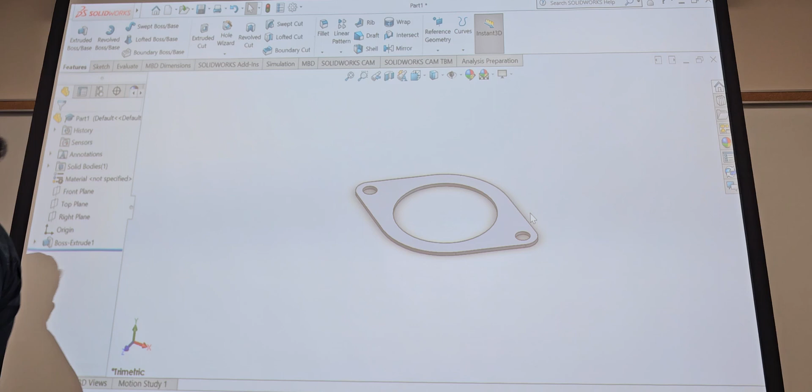You have to save the drawing. Whether you put it on a flash drive or a desktop, obviously that desktop has to have a screen too, but you have to save it somewhere. So go to File, Save As, and we're just gonna type right here, gasket.

So notice that right now, I'm gonna save it as a SLD PRT. So it's saving as a SolidWorks drawing, correct?

Now, like I said earlier, eSprit was smart enough to partner up with SolidWorks. Well, I don't think they're really partners, like they don't pay each other anything. But they agree with SolidWorks to let SolidWorks drawings be imported to eSprit. All the top major companies did that. So pretty much SolidWorks is accepted if you're using Mastercam, GibbsCam, eSprit.

There's another one called NX. NX I heard is really, really good, but the problem is it's so expensive, so not that many people use it. We gotta realize that if you buy SolidWorks straight up for your company, I don't even know how much it costs. One of those things where it says purchase this, call somebody so they can give you a quote. Maybe that's gonna be a lot of money, if they don't even put the price on there.

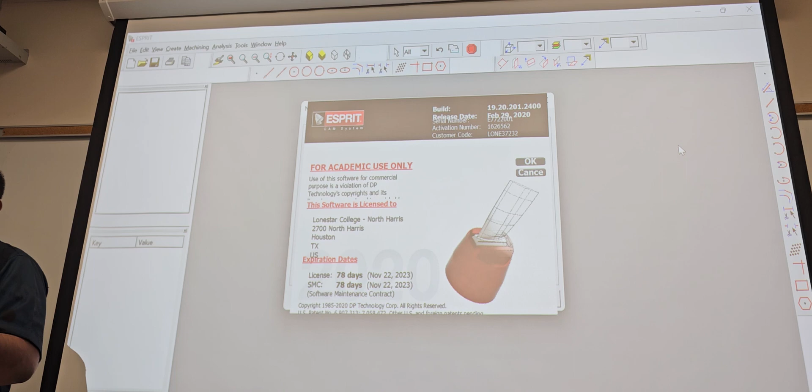Now from there, I come over and open up eSprit. Oh no, I've told these guys to update my eSprit. You guys see how this says release date 2020? The ones on your computers are 2022, updated, because this logo is blue, and your expiration expires sooner than ours. So let me see if it's gonna let me import it here, because last time it said it was just a blank document.

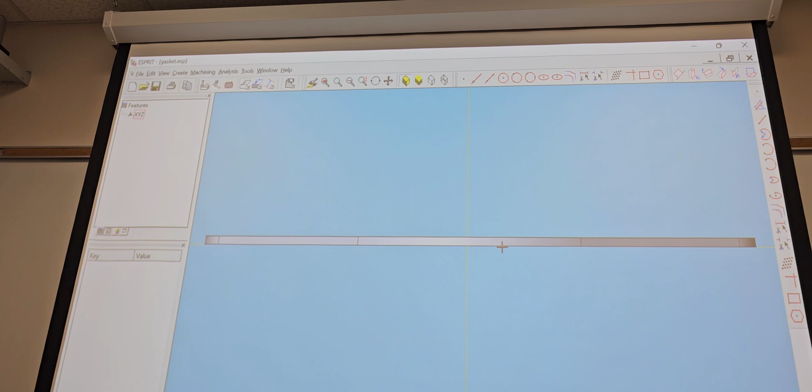So if I go to File and Open, it's showing all the eSprit files down here. I'm gonna click the SolidWorks file, SLD PRT. All right, let me... all right, cool. There's our part, right?

So like I said guys, typically every company has their drafters. The engineers are gonna get with the drafters, and the drafter is the one that's gonna draw this part on SolidWorks or any other CAD software. Then once that happens, you're also gonna make the blueprint. Then they give it to the machinist, the programmer, and the programmer can open up this file and import it into eSprit. So now we're gonna go to the programming side of the job. We were basically acting like the drafters when we drew it up. Now we're gonna put on another hat, of a programmer.

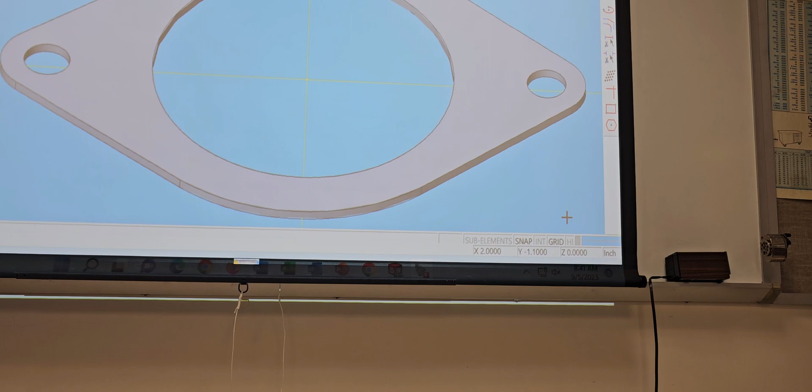Okay, so we gotta know how to use sub-elements and hide, and then snap and grid. With snap and grid, say I wanted to add a point down here, it will grab it, it will make that point - oh, it's not on a Z. If you hover around it, it's gonna find the center of that point on the snap and grid. But if I wanna click one surface, one face, I gotta change it to sub-elements and hide. I know some of you guys had that issue on Thursday, y'all weren't able to figure that one out. So make sure you go to sub-elements and hide.

So now if I click on the face, it's asking me, is this the face you really want, with a question mark? So you left click again and confirm, saying yes. Like I said guys, you want to go to tools first, go to options, change this group items to a different color, because when it's dark gray like that and the part's gray, sometimes you don't know what face you highlighted. So if I change this color for group items to, let's say, pink, I hit OK, then hit OK. Now if I highlight this face - there we go - I know that's the face I want it to be on.

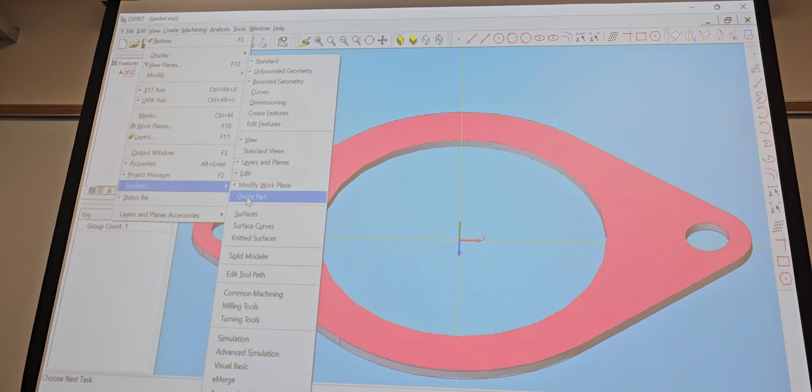So when you go to View, you want to turn on this UVW, because it's going to tell you where your axes are at. Then we're going to go to View, toolbars, and come down to orient part. This is gonna open up another little window on the right with three different options, X, Y, and Z, with an up arrow. So when I click this, boom, you see that came up?

Now, the problem whenever we import the drawing from SolidWorks is that if I did it on my top plane, it's basically gonna be on my front plane when I import it to eSprit. So that all has to do with how you drew it, whether on top plane, front plane, or whatever. But luckily we have the option to rotate the part. Because how much would it suck if we didn't have that option? From the get-go you'd have to do it strictly on front plane no matter what, and it has to stay like that for the whole drawing. That wouldn't be so great.

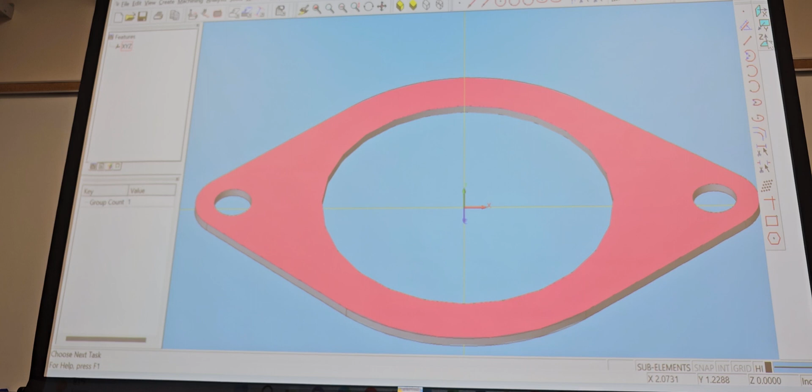So luckily somebody way smarter than me was able to make this software and give us that tool. So when I click the face, Z up, boom - you see how that part flipped? So now if I hit F7, that's my top plane. So here's my X, my Y, and my Z going down.

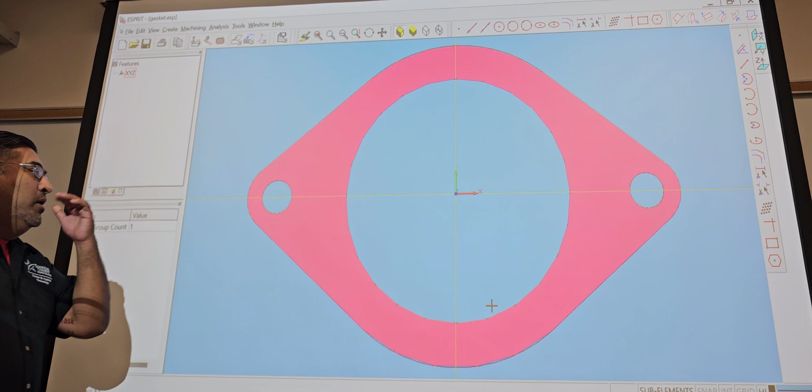The reason we're doing this is we gotta imagine doing the part as it will be on the mill. So this is the way we're gonna machine the part from our Z going down. That's why we have to know how to rotate the part, how to get it where we need to be. You remember that example I showed you with the Z plate, how you can move it on your X-axis and your Y-axis? The way the engineers or drafters draw the drawing, you don't have any control of that—they're gonna draw it any way they want. But once you import it, you gotta know how to manipulate it and move it around, and change the view so you're able to work on it.

So here's my part. Like I said, you want to have at least 3 or 4 of these features on so you have more control. If you don't remember how to do this, make sure you write down this for your notes. F2 opens up your features, and that's where you're gonna have your chains, your toolpath, and everything else.

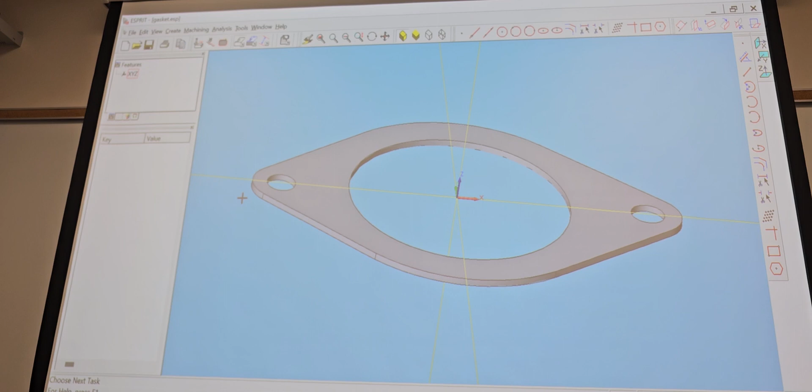F11 turns on your layers. Layers is similar to your mask, where you can activate or deactivate something just by checking the box. But I like putting it in layers because it gives me a lot more control.

Depending on where you work at, that programmer has their own style of doing things. For me, the way that's easier for me—right now everything's on default. So I hit new, I can make a new layer. On this one I'm gonna put 'geo' for my geometry. I'm gonna hit new and put 'part solid.' Then I'm gonna hit new and put 'chains.' Then I'm gonna hit new and put 'toolpath.'

Like I said guys, depending on where you work at, it's how they do this. I worked at a shop before where, because you got competition everywhere, people talk mess about somebody else. At this one company we had two different programmers who'd been working there a long time. One would be like, 'oh no man, you don't need to put all those layers, you only need like 1 or 2.' The other guy had like 10 of them on there, and he'd always talk mess about the other one, like 'that one doesn't have his stuff organized.' And the other guy would be like, 'oh, he does too much, you don't have to do all that to get the job done.' But whatever you feel comfortable, don't let nobody take that away. However you get the job done, that's the most important thing.

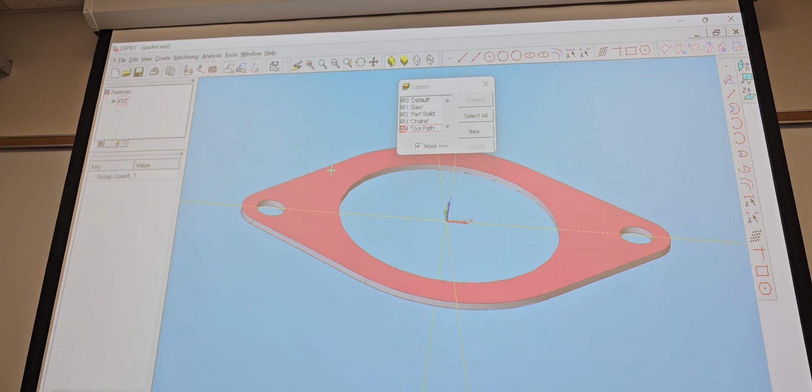So if I come back over here and click my part, notice that I just got my face. Why? Because I still have sub-elements and high on. If I take those off, now I'll push snap and grid. Now when I select the feature, it selects the whole solid, not just grabbing one face. So over here, under my key, if I open up general, down here is my layer—I could change which layer this part is on. I'm just gonna click part solid. Now if I uncheck it, the whole thing goes away. Does that make sense?

I don't have a key on mine. Is it the bottom tab? No, push Alt Enter. Alt Enter opens up this key. So F2, F11, Alt Enter.

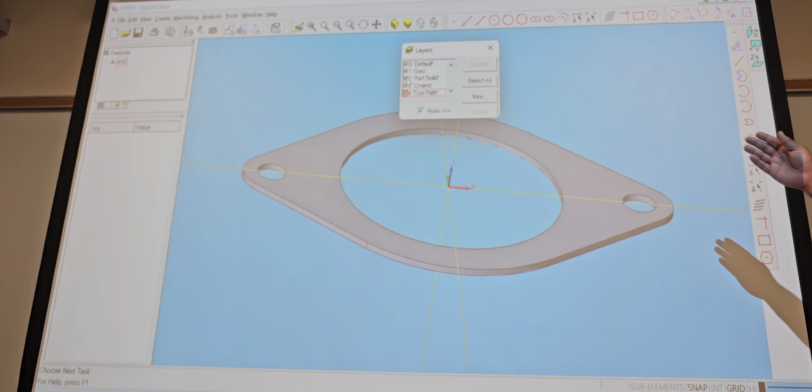If you push Control M, that opens up your mask, but your mask is pretty much like your layers, just a lot more. See, if I push Control M, that's my mask, but there's a lot more options here. You can take off the part, you can take off the toolpath, pretty much what this is, but we only need minimum these, so that's why I like putting the layers instead of messing with the mask, because there's so much on there.

So when you just did that, can you redo what you just did real quick? Cause I was trying to follow along but I just didn't catch it. On the key—yeah, like I said, your snap and grid have to be on.

You select the part, right? Now under here on the general, you open up the layer, and I could put this on any one that I made, right? So I'm gonna keep it on the part solid. So now if I check part solid, I'm in control of it now, right?

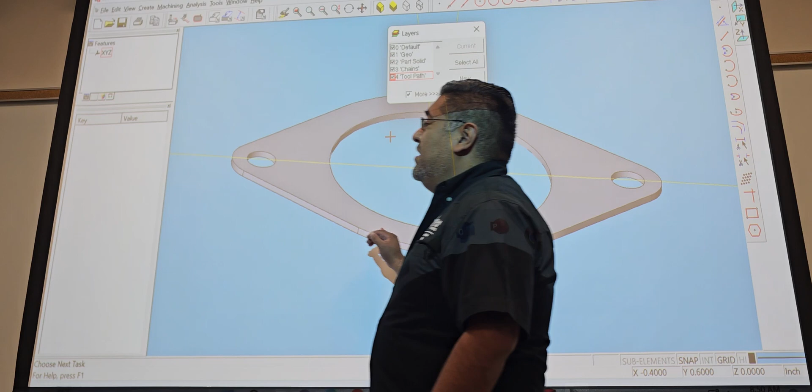When it comes out, it goes back in, correct? So now for me to do my chains, I need to be able to select my lines, right? So obviously right now I don't have any lines. Well, I have the solid, but I don't have any lines, wireframes in the background, right?

So what I'm gonna do is go to Geo, because I want it on the Geo, right? Click the part, right click it, hit copy, and go to Smash. With Smash, you gotta have wireframe on. So right here is checked, correct? Then we hit OK.

Now, if I turn off my part solid, there goes my wireframe.

I think I did part solid wrong. You did what? Did part solid wrong. Oh, does everybody have this so far?

All right, now that I have this, basically all I'm gonna do is what we did in intro, correct? So in intro, we learned how to make your lines, how to make your toolpath and everything, right? So it's basically what we're gonna do now, what we did in intro.

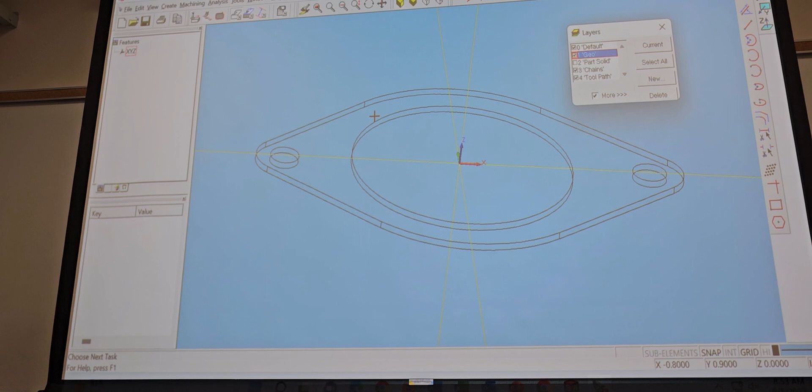So, a big thing guys, is once you start doing your chains and everything like that, a lot of people that learn just here in the classroom setting, they don't do it correctly like in the real world. Why? Because they don't put the tools organized and make them like it would be in the real world.

Does that make sense? So if I just get a tool, it's gonna randomly select a number for me, like 165. Well, if I take that program and put it in that Haas, how many tools does that Haas have code? 20. Where the heck did they get the other 165 from, right? So when it calls that tool out, it's not gonna know what to do.

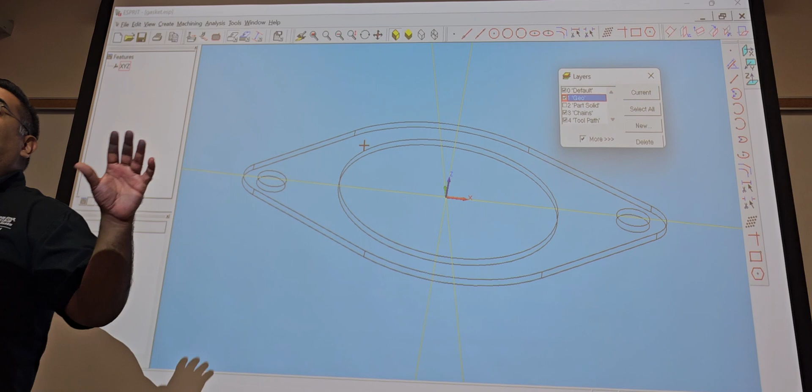The machine itself is gonna give you a code, right? So here it's gonna run the simulation, no problem, because it's in fairy tale land, right? But we need to start thinking as programmers, is this gonna actually work on my machine? Because this is like anything else in life, guys. If you do it good, if you do it perfect, it's gonna do what you want it to do, right? But there's so many ways of messing up, and not a lot of ways of doing it right.

Does that make sense? So, bottom line, what we do here, we have to be able to put it on the post processor, correct? Put that on the machine, and make sure it cuts out this gasket, or the part that we're making, right? So right off the bat, I gotta be thinking, okay, what operations am I gonna do? How am I gonna do it, right? In real life, what will we do first as an operation on this?

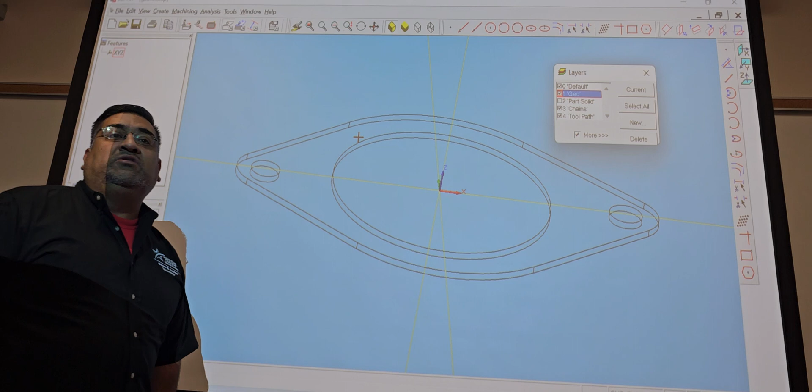Face. Facing, right? You always do facing first, pretty much, correct? So, if I just click on the outside lines and I put my face mill, depending on what size it is, it probably won't make the proper cut. Does that make sense? Or it's gonna face it and it's not gonna touch the whole solid. It's just gonna touch like on the side or something else, correct?

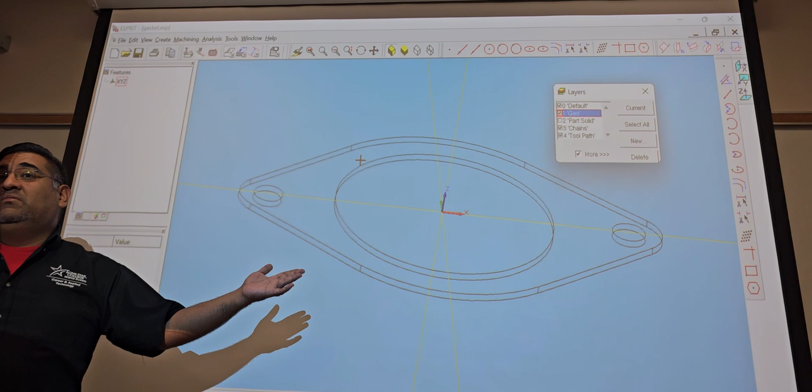So a way to get away from that is to make more lines, right? A lot of people think, nah man, you can't add more lines because that's not the part. I can tell it to do whatever I want it to do, as long as I know how to do it. Lie to it. Exactly, right? You can lie to it.

Does that make sense? So me, I like lying to it, because it feels like if I got away with something, and I didn't get in trouble, and I got away. You know, like it's all right. It happened, so it's cool. So I love lying to that machine, right? As long as it does what I need it to do, whatever you gotta do, you could do it, correct?

So, if this gasket, so the thickness is what? 2.5, 2.66, no, 2.88, right? So from this top to this bottom, it's 1.44 radius, correct? So it's 2.88 wide, big, correct?

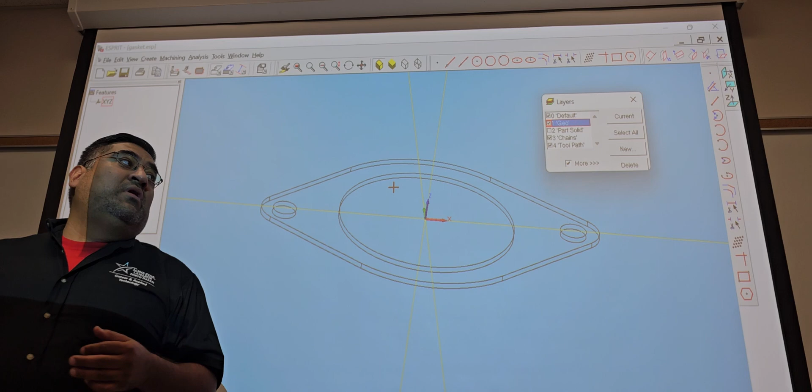So from the get-go, I gotta start thinking how my machine is, right? So what tools do I have? So for example, tool number one that we use on there is a 3-inch diameter face mill, correct? So I could actually just do one line going through the part, and it's gonna face off all that material in one shot. Does that make sense? So that's all I'm gonna do.

I'm gonna hit F7. I'm gonna grab a line, and I'm just gonna come from here.

Oh no, wait. Yeah, there it is. So now I'm gonna go to create, features, get a manual line, go from here to over here, and then stop it. Where's my stop at? Why does this look like this? Hold on guys, this always happens.

Bring that down, bring this over, bring this down. There you go, see, it was hiding. So now that I made that line, I'm gonna hit stop now. Where'd it go? Why isn't it making it?

Is it working for you guys? The manual or the auto change? The manual, can you click on that line? Yeah, is it making that line for you? It's on and off.

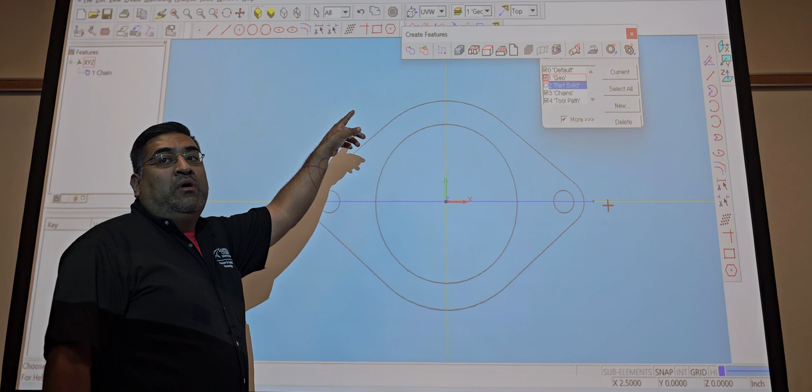That's it, right? So then you click the chain and then click on the, from one point to the other? Yeah, click on one point, click manual chain, the blue one, right? The red one's auto, the blue one is manual. So you click one end, you click the other end, and then you hit stop on the top. Okay, and if you don't hit stop, it's not gonna save that chain.

Yeah, you just leave it on. Like a car, automatic and manual. Huh? Auto and manual, yeah, like transmission.

Everybody there? Mine just never forms that chain. Did you do the points? Yeah, here.

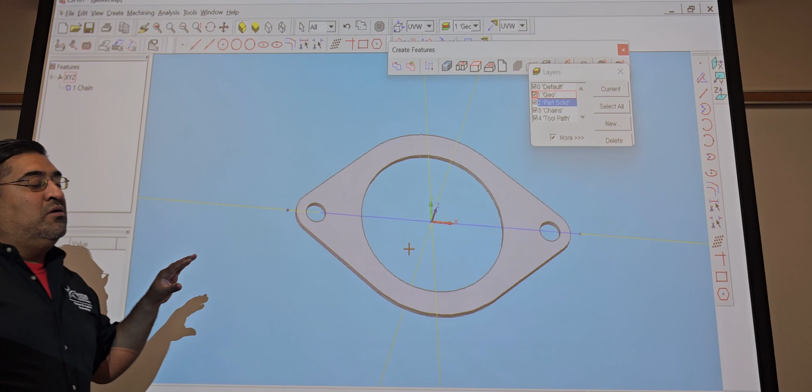Now we want to get our solid, we're going to put our solid in our simulator, right? So really guys, when I make a solid on the part, like the part stock, that's just in ESPRIT. It's not real life, right? But if you don't do it, you're not going to be able to see the cutting motion of it, right? But we know that out here in the real world, it's whatever you cut your stock material to be, correct?

So I'm gonna go ahead and we gotta go to mill first. So switch to solid mill. Then right here, the simulation comes out, right? And then over here goes simulation parameters. We go to our solid.

So just like Gabriel taught you guys, we can make this any way we want, right? So we could input the numbers in here, so we switch the numbers, or we could pick the arrow and then click on our part, and then it automatically generates the numbers for us, correct? Why are you laughing? He didn't show us that. That seems like it'd be a lot easier. Oh yeah, he showed us this last class. How did you do that, would be nice to know.

All right, look up here real quick. Once you go to the switch to solid mill, now you're able to click on this one, simulation, right? So hit simulation and then go to simulation parameters. So he made us really think about all the numbers we had to put in, and then on the start X, Y, and Z, we had to like put all these negative numbers in.

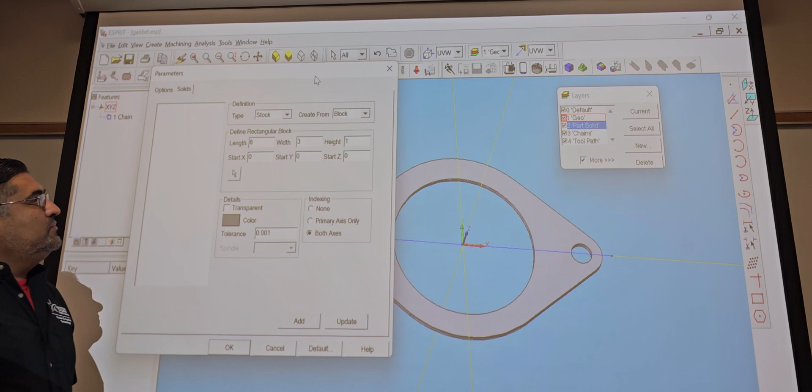So I mean, you can do it either way, guys, right? So let's say that in real life sometimes, what I do is obviously you gotta measure the stock material that you really have, correct? And then from there is when I input my numbers. So if I just click on this and click on the part, well, I'm not actually compensating for the actual stock material. Does that make sense?

But you can easily just change those numbers to compensate whatever you're missing from that stock material, right? So normally I just click this arrow, click the part, we see how it moved, right? So it set all my numbers for me. Go to add, there was a stock. Make sure you have to make sure you have the stock on there, right? And then hit OK. Now when I push the pause button, there's the material right there, right? And like I said guys, I could change these numbers to whatever I want.

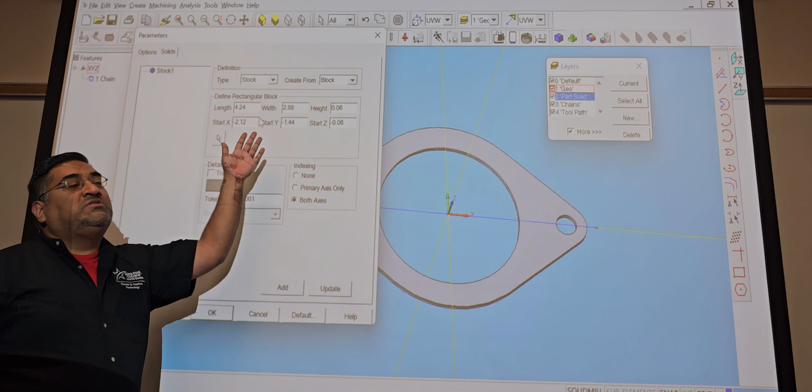So it is good that he taught you guys that way too, right? Because you could tell that, hey, my material is actually longer than this, or it's wider, or it's deeper than it, right? But just for our purposes, we're just gonna click it right now.

But if we were really making this part, we'd go out there and actually measure the material, and then we'd adjust these because your stock is gonna be different from the exact measurement. You're always gonna have more material in your stock, it's not gonna be exactly what this is. So if I hit OK, like I said, if I hit pause, there's the material, right?

So now if I go to chain, I come up here to solid mill traditional, I go to facing. You didn't select the chain first. It's not liking it, it's saying that it's not a closed feature. It didn't like just having that line on there, which I don't know if it's because of the software, but normally you could just make that and they'll make it for you.

Yours came out? Look at yours on the left though, it shows yellow then blue to the dot. I wonder if that's it. No, oh it's doing it. Okay, yeah, I think this is because it's the older model. Because mine is this 2000s version, your guys is newer.

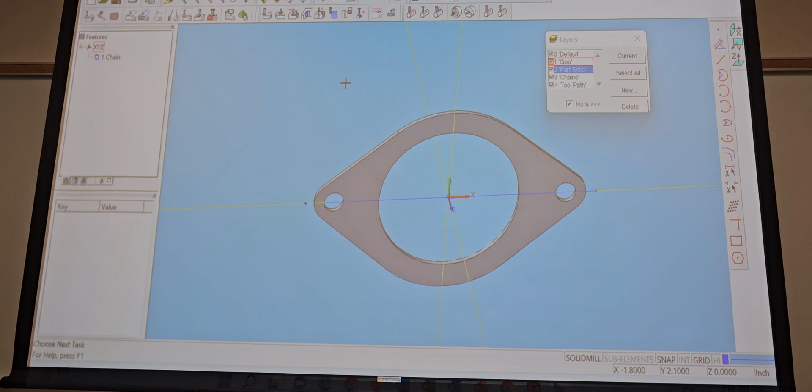I see why mine came up, so I went to milling tools. It's not even letting me do that. Yeah, I'm getting the same thing. Yeah, I clicked milling, switch to solid mill, and then it gives you this, right, and then it gave me a pick right there, milling tools, and then hit the face mill.

No, but that's just the tool ID and everything, it's not the actual facing.

Alright, so we're just gonna do this, we're gonna make some lines so then it could be enclosed, right? I think it's just because of the software. So if I go here, I bring it over, that is negative 2.2. Draw another one over here at 2.2. On this side, make one from here to here, so that's 1.5, take another one down 1.5.

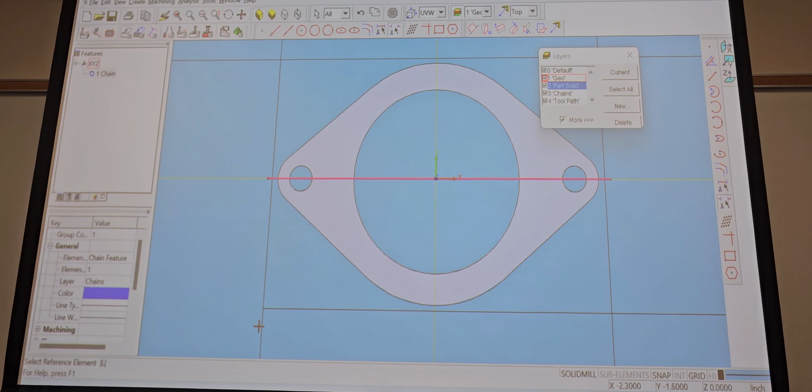Alright, so now I'm just gonna trim these outside ones. Now if I select this, I'm gonna go to create features, auto, right? Boom, it made that change now, right? So now from there, it should give me the facing now because it's enclosed. We got it?

That's weird, they didn't let me do it because I've done that when I worked at that shop and there was no problem. Older version. And you hit manual chain, right, and the box is auto chain. When you select the box, you just hit auto chain and it automatically does it for you.

Now we see how this arrow is down here and it's facing that direction, right? So if I wanted to change the direction, I could highlight the chain, right click, go to create, edit features, and here I could reverse the chain. Or here I could also change the start point, new start, and let's say I want to pick it up here. So you guys see how now it's up here, right? And then I'm going to reverse it there. So you could change it to any way you want, right?

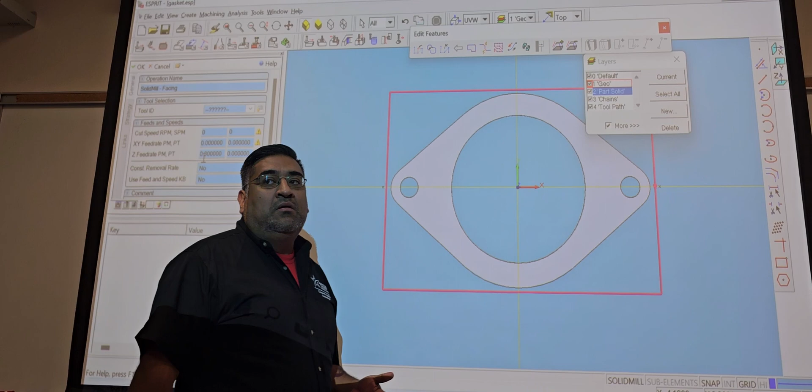Guys, now we're gonna highlight that chain, come to facing, right? So if we go here, if we click down, we could go to system default all. Now some people teach you to do that every time, right? When you do system default all, it erases everything and you start brand new. I don't like doing that because then you gotta check every little box again, correct?

Normally, let's say I would face this, the screen's gonna remember it. So next part I make of facing, it's gonna be like, oh this is what you had last time, do you wanna use that again, right? So when you're facing, it's normally the same thing, correct? So I don't like hitting system default all. Some people teach you to do it every single time, not me, I like whatever's faster, whatever's gonna get done.

So, solid mill facing, right? I come over here, I'm gonna click metric, go to inches. This little filter right here will tell me what tools I have. So I'm gonna use face mill, 3 inch. Hit OK.

Now, if I look up here, if I click on my tools, look what number that gave. 165, right? Now, I can't fix that until I get out of the operation.

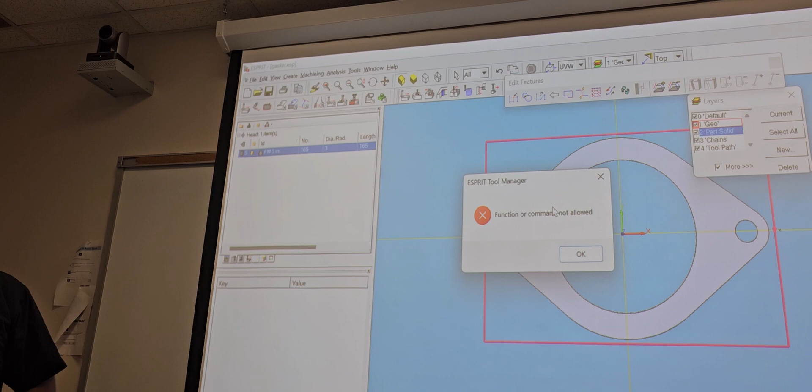So now that I'm out, you see how it's saying function not allowed? Because I have that facing operation open. I need to come out of it, so I hit escape and just come out of it. Now if I go to my tools, I'm able to click in it now, right?

So on this one, it's gonna be tool number 1, correct? And it's gonna change that automatically to a 1 also. So now I'm gonna hit OK.

So in our case though, we're gonna leave it as 1, because as a programmer, that's one of the things you have to do. A lot of times, if you're working on a program and it's not finished yet, the guy that's gonna run the part on the machine, they want a tool list, right? Which tools am I gonna use? So the quicker you can get them the tool list, the better and the faster it's gonna be for them.

Instead of just sitting there waiting for you, they can already start getting the tools together, right? Because obviously you need to put the tools together to run the job, correct?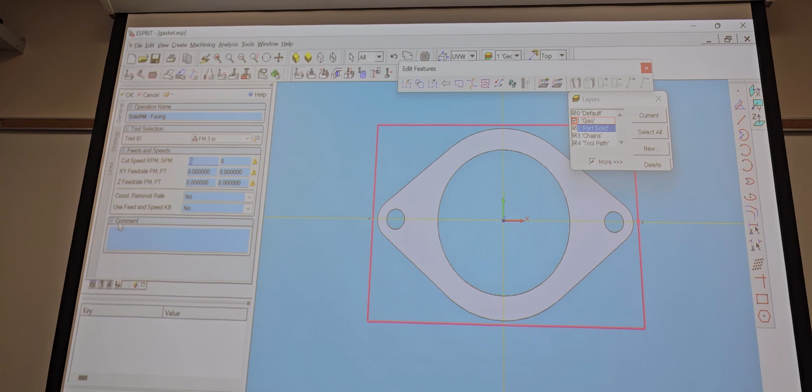So down here, it says RPMs, right? So obviously you're gonna change those RPMs to whatever your machine is capable of. If we're just running the simulation, you can leave them blank and it'll still run the simulator. But if I don't give it any numbers, once I run the post processor, it's not gonna have any numbers there. So what's gonna happen with that code, when you put it on the machine, you're gonna get an alarm, because you're not giving it a spindle speed or a feed rate.

Does that make sense? So, I'm gonna set the RPMs to 3,000. Feed rate on X and Y, I'm just gonna hit 20 point. And then my Z's coming down, so I'm just gonna hit 40. 100%.

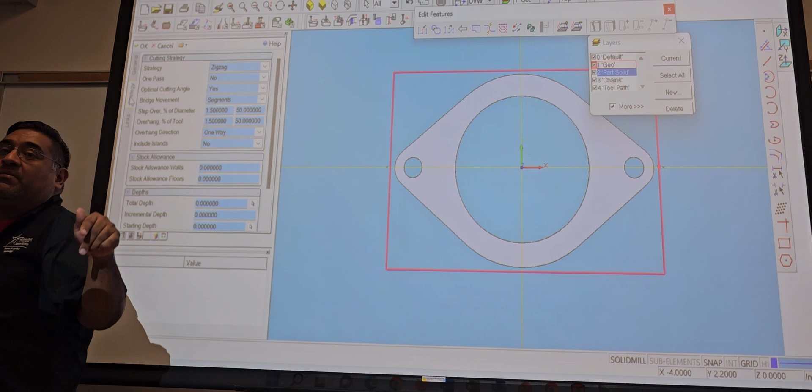Alright, so here, strategy, the cutting strategy, I could go zigzag, I could go parallel, I could go straight, whatever I want to do. So if I move this, it's going to change the way it generates the code, the way the cutting path is. Does that make sense? So that's what the strategy is. See how it's zigzag, conventional, or climbing, right?

One pass, yes, no, or adaptive. Optimal cutting angle, yes. Bridge segments, all this is fine. Your step over is at 50%. So this is how you control whether you're going to take 1 pass or 2 passes on there.

Stock allowance for the walls. Obviously, we're facing, so we don't need to worry about the walls, because we're just facing it.

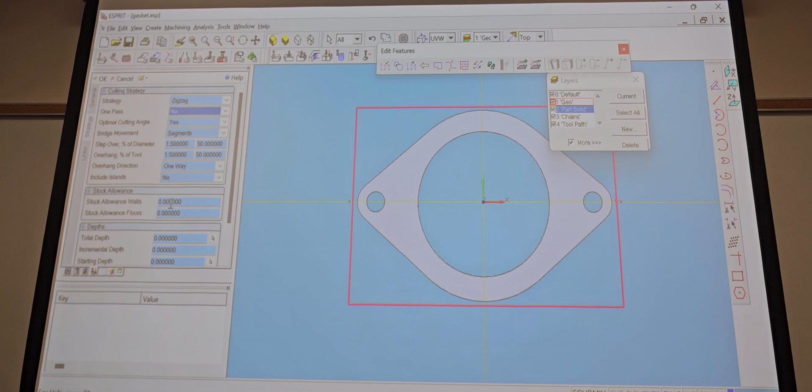So let's say that in real life, we're making a part. One company that I worked for, we would make molds. So we would machine this aluminum out for the creation of a mold, because they had molding machines. That molding machine would inject the plastic to the shape that we cut it. That job was kind of hard because they had a lot of tolerances of plus like 5/10 of a thousandths minus 0. So what we would do is we would leave stock allowance on the walls, at least 5 thousandths, so we could baby the tool in there.

But that's how you control that in real life, when you put your stock walls. So you got finished passes and everything else. Does that make sense?

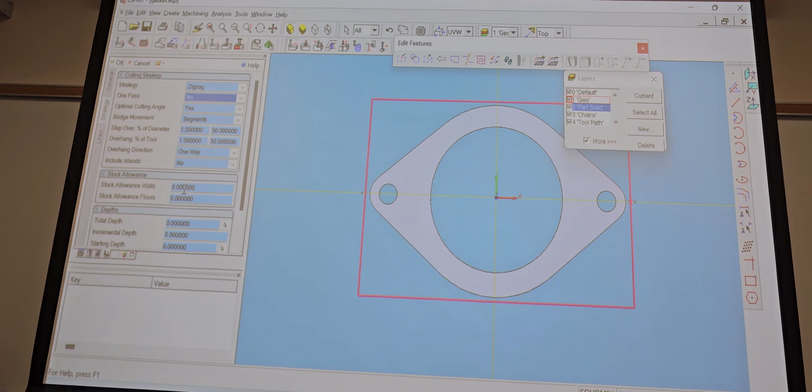So, total depth, we're just gonna put 5 thousandths, because if not, we're not gonna see a cut or anything like that.

Stock automation, we're just gonna leave it as no, because it's just gonna be the stock. Links, so this is the entry mode, this is how it's gonna enter. It's gonna go down, then over. Obviously, we can change this to whatever we want. Rapid down, and then feed over.

And exiting mode, that's how it's gonna exit. It's gonna go over, then to the top. So depending on what operation you're doing, these will sometimes change. So, for example, if I'm doing the circular interpolation, it's gonna give me more options.

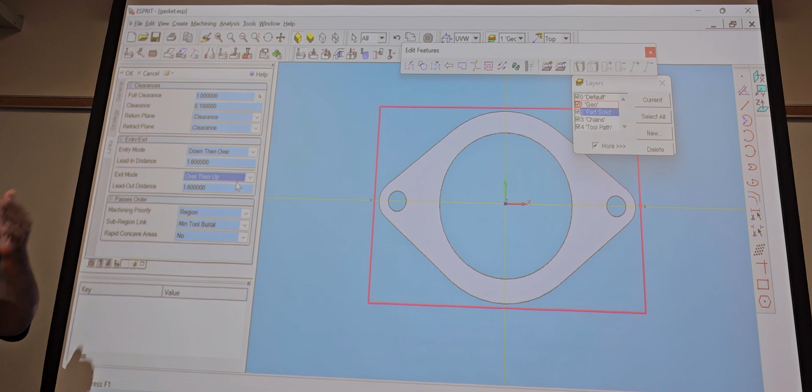But since it knows that I'm facing, all you gotta do is approach it this way and exit it that way. There's not really much to it. Does that make sense? So we hit OK. So now we see this line right here, right?

So that is gonna be my toolpath, correct? If it's not on the toolpath, like right now it's on the geo, right? I can just change this to toolpath, correct? Now if I hit play, boom, it faced the part, right? So we see here, it faced one side, then it faced the other side, right?

But like I said, it did it like that because we left zigzag on and we told it to go 50%, right? Let's see what happens if we tell it to go 100.

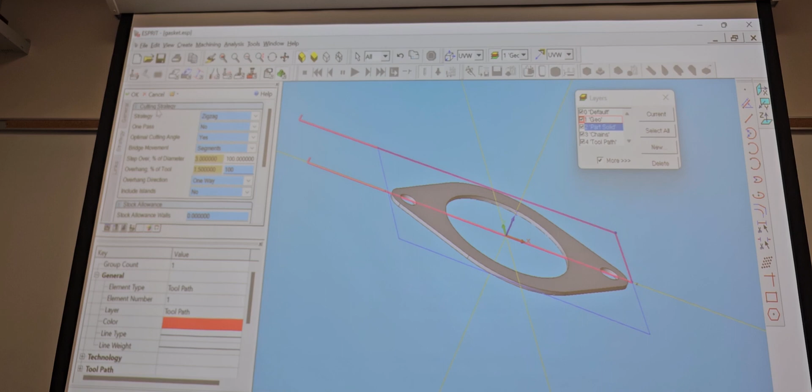Y'all see how I changed the toolpath now? Now it only does one shot. Does that make sense? And you just changed the step over there? Yeah.

How'd you get that window? The toolpath screen? Down here? Yeah. What is it, guys? F2, or F11? No, F11 is the letters. Push Alt Enter. Yeah, get it?

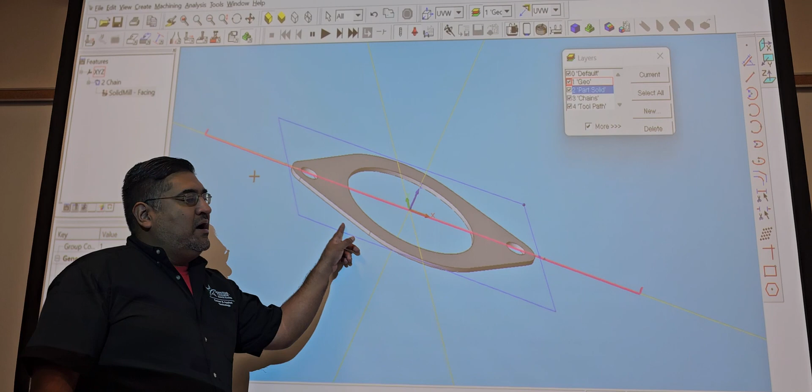We got our facing done, correct? So now we have to make the cuts on the outside, then the cuts on the inside, and then drilling the holes.

Normally you would think, is one operation gonna affect another operation? Does that make sense? So the order that you do it in, does it matter? Or can you do anything you want and it's not gonna be a big deal, right?

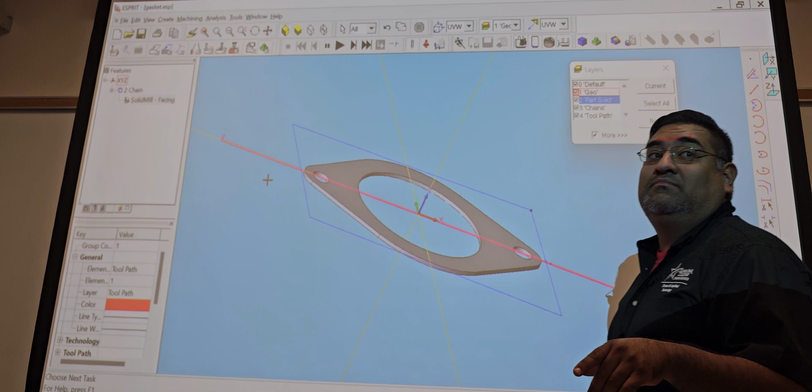For example, if I was doing a part on the lathe, and I had threads, but I still had to do the ID too, it had ID work that goes through it, right? What would you wanna do first, the threads, or would you wanna bore the ID? We want to do threads first.

Why? Because once you bore that ID, you got less material now. So whenever you do your threads, there's more of a risk of chatter. Does that make sense? So when you have the solid stock, the solid material inside of the part, there's less of a chance that you're going to get chatter on them because it's going to be more solid.

So you would want to do the threads first before you do the ID. That's what I mean by less wobble. So, is one operation going to affect another one? No, not really, right? I could drill the holes first. After I face it, I could drill the holes if I want, or I could do that part or this part, correct? Now, we're taking into mind that after we're done cutting that part, we're going to bore some jaws, put it upside down, and then, hold on.

So we're taking it into mind that we're gonna cut the part, put it upside down, and then face off the rest of the material, right?

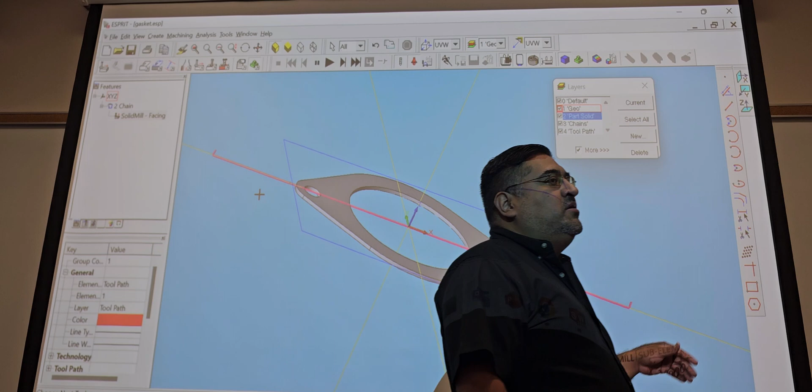Think about it, guys. If we were trying to do it in one shot, how hard would that be? Because think about it, you got the material there. Obviously, you would actually try to do the circle to begin with, because if I do the outside first, what's gonna happen to the part? It's gonna fly off, right?

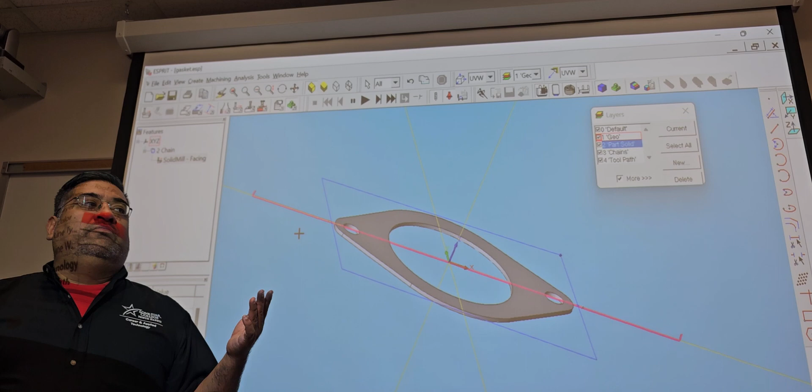Whatever I'm holding it with, the vice or anything else, correct? Correct. But since we said that we're gonna machine it first, then flip it upside down, and put it on soft jaws, it doesn't make a difference then, because the material's gonna stay intact. Does that make sense? Because that's the only real way you could do this. Yes, in the simulation, I could machine this and then machine that, and it doesn't matter because it's not real life, real life physics aren't involved in that.

Does that make sense? Everything is over here like in fairy tale land, right? So different things like that, we gotta make sure that we're covering as we're doing the part. Does that make sense? So now I'm just gonna take off my solid, come up here, and let's say, it doesn't matter guys, we could do the inside first, or we could do the outside first, it doesn't matter.

Before, you had us deleting those vertical lines. Yeah, so if I click on this line, if I have snap and grid on, right, I could click on that line, hold down shift, and then if I click on that line, look how everything gets highlighted, right? So if I hit control though, then I could just click these on the outsides. Does that make sense? So we can leave them vertically.

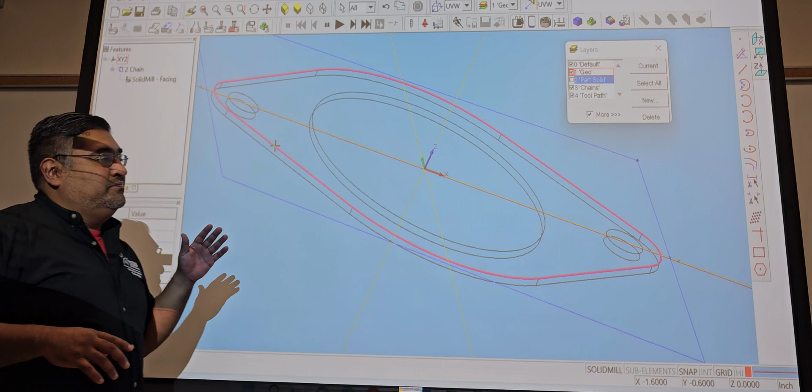So the reason why I had you guys delete it is so if you put shift and click on that line, it'll just get that top line, and that's it, right? Like I said, a lot of times there's multiple ways to do it. So just hitting control, holding it down, and clicking them individually would work also. Does that make sense? But yeah, normally, if you take off those lines, I just made it easier for myself, and I just gotta click shift and hit one line, and that's it, right?

So now we could either make a contour, most likely we have to make a contour for it. So we highlighted that, we go to create, features, auto chain, right? So now if I click it, that's the chain that it made, correct?

Now, depending on where the arrow is, so the arrow is right here, right? It's going up to the left, correct?

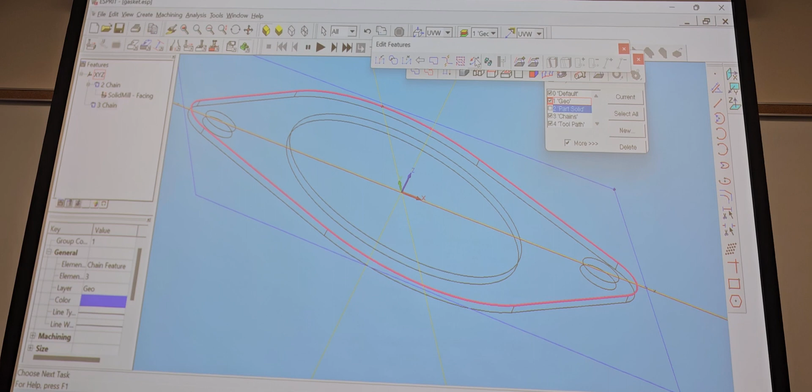So if I don't like it, like I said, I could go to create, edit features, and I could change it, right? So now it's going that way. That's the way I want it because I want the cutter comp to be to the left. Does that make sense?

But that's how you would change it. And that has a lot of play with your tool and what direction it's going in, right?

So if I start making my actual tool path and my tool is actually coming in here, instead of it being on the outside, that's gonna be because either your arrow is facing the wrong way or you put the wrong cutter comp direction. Does that make sense?

So now that I got that chain, I'm gonna click it, come over here to contouring. Now the same thing is gonna happen because I don't have that tool yet, right? So I'm gonna grab my end mill, I'm just gonna use a 1/2 inch end mill.

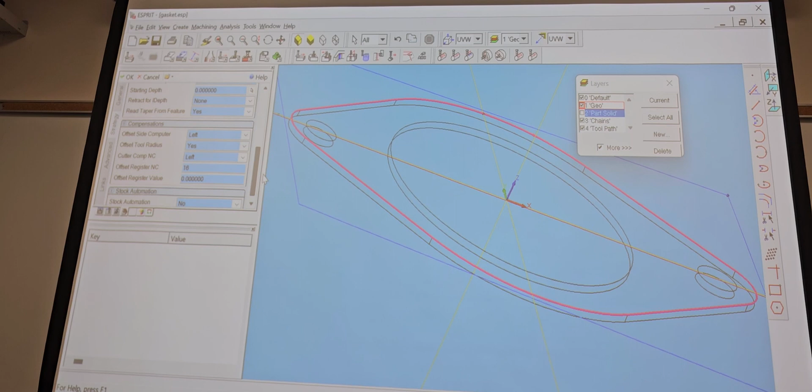Hit okay, right? Now it automatically gave it a number. But we see how right here it says offset register NC 16, right?

So that's telling it, can y'all see better with this light off? Because I know some of you guys are struggling to see. Is that better? Yeah, oh yeah. How is it for the video? Is it way affecting it? Better? No, it's way better. Okay, so...

So obviously guys, I'm gonna take the short route and just go to cancel because I can't adjust the tool while I still have that operation open, right?

So I'm gonna come over here now and that's gonna be my tool number 2, right? So tool number 1 is my facing, tool number 2 is gonna be that 1/2 inch end mill. Now, when you give the operator the tool list, now he knows where to load these in.

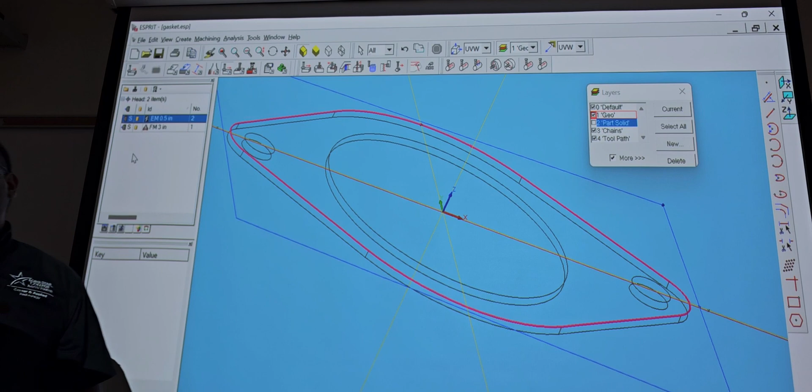Exactly. Now, on the lathe, that's why you still need to go through the program, right? Because a lot of times on the lathe, well 9 times out of 10, your tool number 1 is gonna be a rougher, tool number 2 is gonna be your finisher. When we start running into problems, it's tool number 3, 4, and 5, right? Because we don't know if it's a part off, we don't know if it's a threading tool, we don't know if it's a grooving tool. It could be any one of those.

So a lot of times the programmer, he knows tool number 1 is your rougher, tool number 2 is your finisher. But we gotta make sure that the other tools match the program. And you go down and look and see.

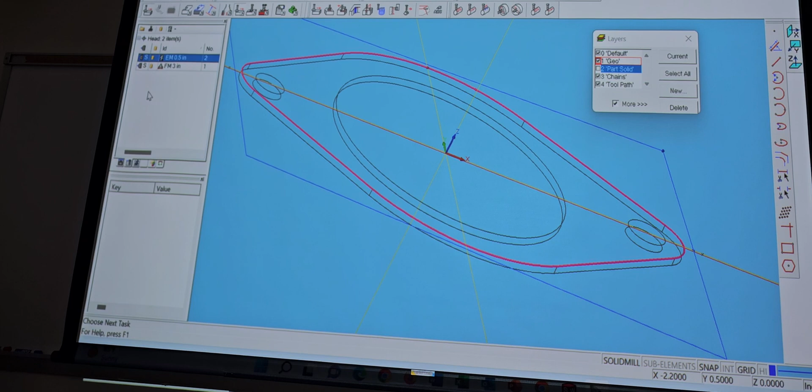You have to. And then the direction that it's spinning also, right? Is my insert facing up or is it facing down? Because if it's facing the wrong way, what's gonna happen? You're gonna kill that insert, right? Crash. Hopefully you just break that insert and then you stop it after that. But if it breaks and it keeps on going, bad day, right? Bad juju.

So now I'm gonna come back. I'm gonna go back to my chain. Now, guys, you can rename your chains to whatever you want. The rule is, though, if I start naming it like facing, turning OD, this, that, or whatever, it's gonna relocate itself alphabetically. Does that make sense?

So what I usually like doing is I'll click that chain, right click, hit rename, and then I'll put 1 dash facing.

Where's these? I'll rename it and put 2 dash, cutting contour OD profile. Or profile, whatever makes sense to you, right? That keeps it in order with the number.

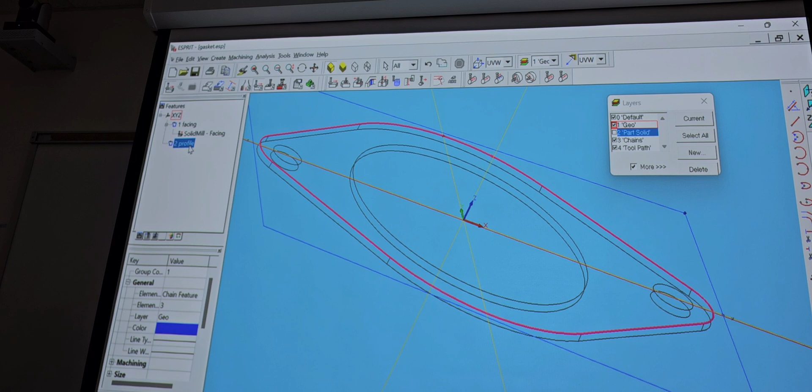By putting those numbers on there, it's gonna keep it in order, right? Like I tell everybody, make sure you take the extra time of doing that because you just have more control. Because this is a very simple part, correct? It's easy, but wait until you get to more difficult parts with 100 operations. If you find something that's wrong and you gotta narrow it down, this way you have more control of it. Does that make sense?

All right, so we have the profile. Did we check to make sure that it's good? No. Oh, we didn't actually do it. You gotta tie a tool to it.

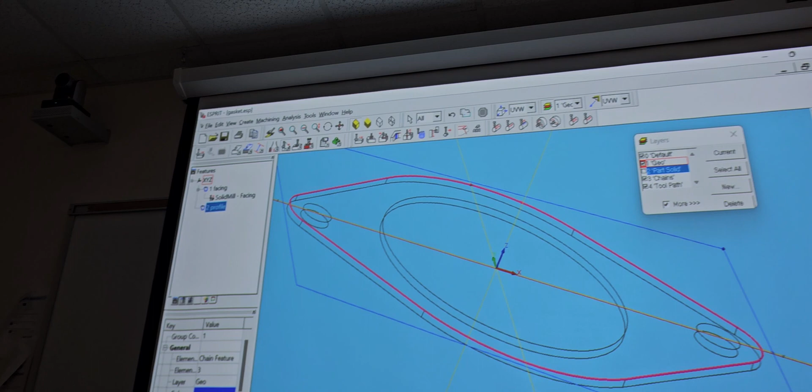All right, so started more traditional. We're gonna go to contouring now, right? So which tool? The half inch end mill, correct?

RPM, we're just gonna put 1500. 15,000. Whoops, that's gonna be fast.

Sounds like a dental drill. Put some oil on it. Grease it up. I think that would alarm out because I don't think it could go 15,000.

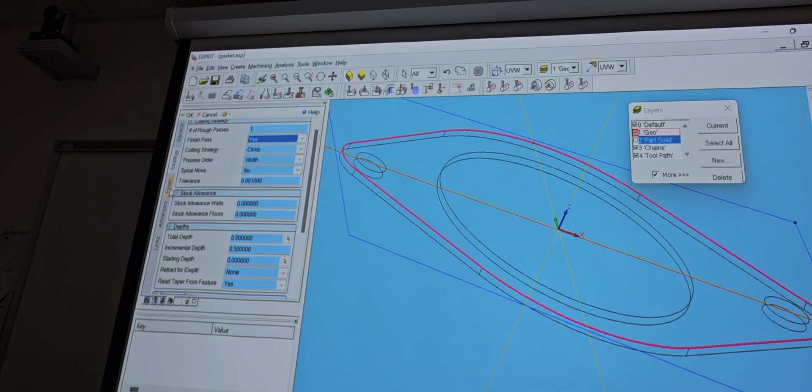All right, so over here on strategy, this number of roughing passes, we're just gonna go 1. Finish pass, no — if I put yes here, look what happened, another option came down, right? For finish, you guys see that? But we don't need it because we're just gonna pretty much cut it, right?

And if this is a gasket, it shouldn't really need tight tolerances, especially if we're talking automotive or some type of pipe. But if this was a part for NASA, then we'd need to get it down to the nitty gritty, not a Home Depot gasket. That internet thing, huh — hey, the ship's gonna launch, hey we need a gasket, go stop at Home Depot before we go, get some O-rings. All right, so that's what that's for.

Cutting strategy, climb. So obviously we can pick conventional or climb, right?

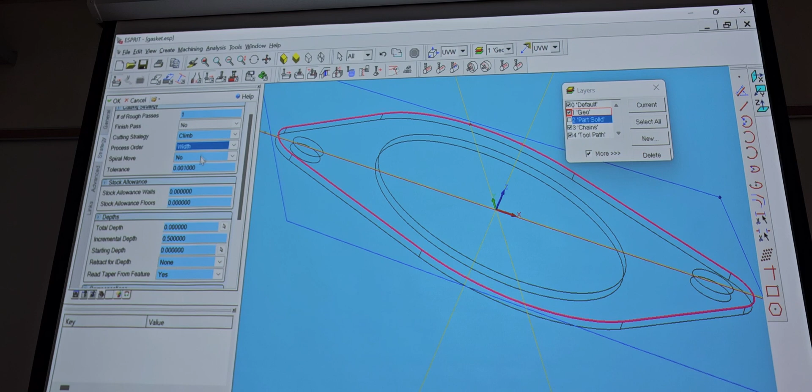Process order — so we're gonna be cutting it by the width, not the depth of it, right? Spiral move, yes or no? I sometimes put yes when I'm bored and want to see it do cool things because it spirals down — it's exciting for me. I don't know, all right.

Stock allowance, like we said earlier, for the walls or for the floor, right? If this was a counterbore and the depth from here to here was very important, then that's when you would leave it for the floors. Does that make sense? You leave like 5 thousandths on there, right?

Total depth, we're gonna call it 100 thousandths, right? So right here, incremental depth — if I leave it at 0.5, this is gonna do it in one shot, correct? Because it's only going down 100 thousandths. So if I change that to 25 thousandths, when it dishes out the code, it would take 4 or 5 different steps. Does that make sense?

Did he go over all this and everything in depth? Yeah, so you guys know all this already? We touched on the depth. But the depth on this, isn't it 60 thousandths? 60 thousandths? Yeah, okay, we're just going a little bit more to 100 thousandths, right?

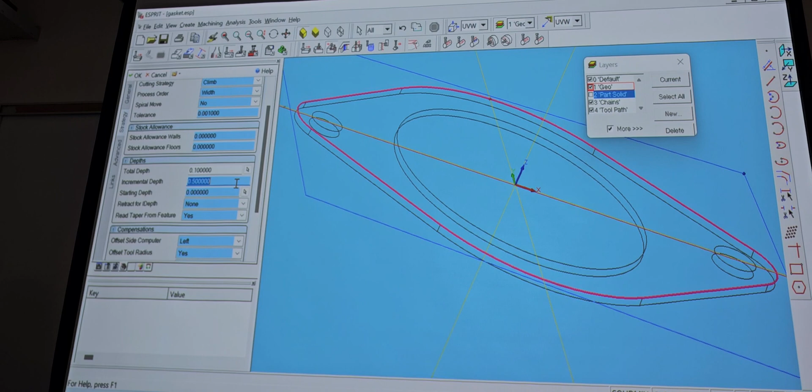Because obviously if you make one side, you'd have to go deeper because when you flip it over, you want it to be a clean surface on the other end, correct?

So offset side, computer to the left, right? That's our cutter comp, correct? Tool radius left, yes. Cutter comp NC to the left, right? So this arrow is facing this way, correct? If you have it on the left, that's why it's gonna cut on the outside of it. If I accidentally push right, it's gonna cut into the part the width of the tool. Does that make sense? So if you have that issue, that's why.

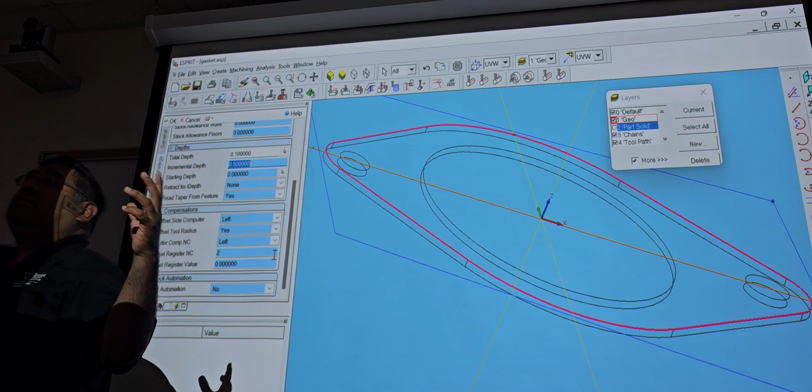Stock automation — like we did in the last class and I showed you guys, if I keep it at no, it's just gonna come over here and cut once, that's it. If I put yes, it's gonna take the stock material into play and cut all that, right? You guys remember that on Thursday? Yes, no, maybe — all right, we'll leave it as no for right now so I can show you both ways, all right?

Advanced — all of this is fine the way that it is. Links, all that. He wasn't even gonna try to pronounce that word. I said you said all this — you didn't even want to try to pronounce that word. I would say trochoidal. How would y'all say that word? Trochoidal — so that's just a strategy, that's how it's going in, and that type of stuff. But like I said, you don't need to change nothing on it, right? It could stay the same as it is.

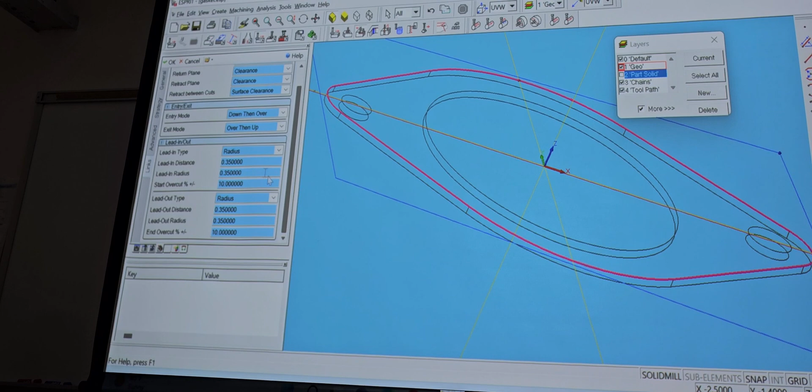Links, this is just your entry mode and your lead out mode, and that's it. So for right now, what we're doing, this isn't that important because it could approach and come out of it any way it wants, right?

Now when it comes into play, let's say we were doing a groove through the middle of it, right? So now I would probably have to change those values to make it come in from here, go up, and then leave, right? Because if you're asking it to radius in, but it goes in from the side, it's going to cut more or less material, and then that's when you'd have issues. Does that make sense? But what we're doing right now, it's not a big deal.

So when I hit OK, we see how the tool comes in here, and it cuts, and then it goes back there, right? Like I said earlier, we put no for the stock material, right? That's why it's leaving this extra material over here, correct?

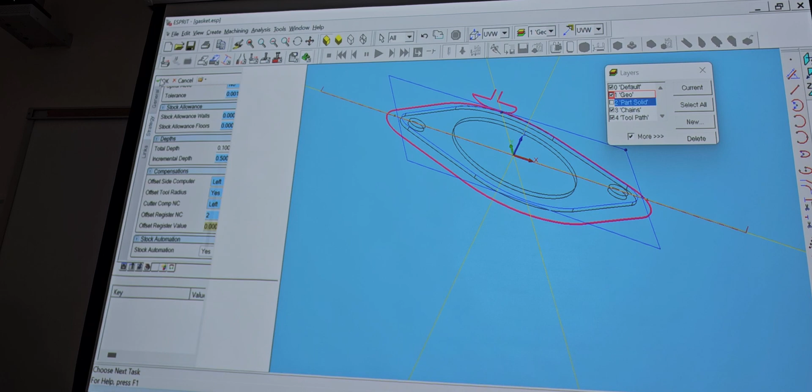If I wanted to change that, I would just go back to contouring, go to strategy, come down, and hit yes. So now when I hit OK, watch what happens to the tool path. That was something we could have learned last time. Right, so now if I hit play, we can see it come from the outside in, right?

That was on the, what's the, stock automation, strategy. Strategy tab under stock automation.

But if you're just cutting that part out, you wouldn't need that. You wouldn't care about the extra material, it would just fall off. It all depends on the situation, how you're holding it, and everything like that.

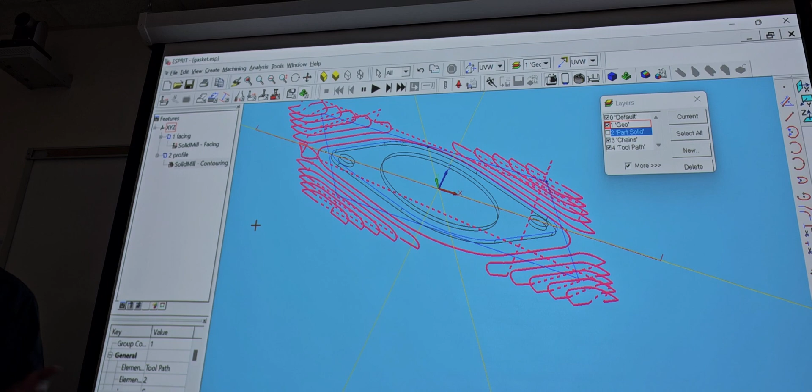If for some reason you're advanced enough that you're holding it down with a magnet, and it's magnetizable, then yes, you could just cut that and then unmagnetize it and take the part out. No big deal. But nine times out of ten, you're holding it with a vise or something else, right? So it needs to be holding it with something.

All right, so that's that one. Now if I click this line, go to create, features, auto chain, right? So there goes my chain. My arrow is going to the right. I don't like that, I'm gonna make my arrow go to the left.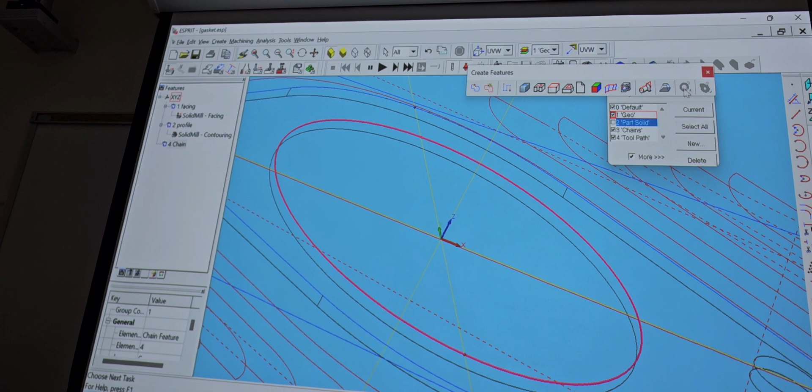See how I moved it? So I'm gonna have the cutter come to the left. Can you grab these little boxes and stick them up there on your toolbar area? I was just wondering, it seems like you have to open it up.

Yeah, but okay, try to get used to this format, guys, because almost everywhere you go, the way that I have it on top is almost the same way how everybody has it, right? Almost any company you go to. I know that when you get ESPRIT on your personal computers, sometimes they're all random, in different places and stuff like that. Try to get used to having it like this, that way it's the same for everybody, and you keep the consistency.

See what you did? Your cutter comp. That's the problem on yours. If it's right, put it that way.

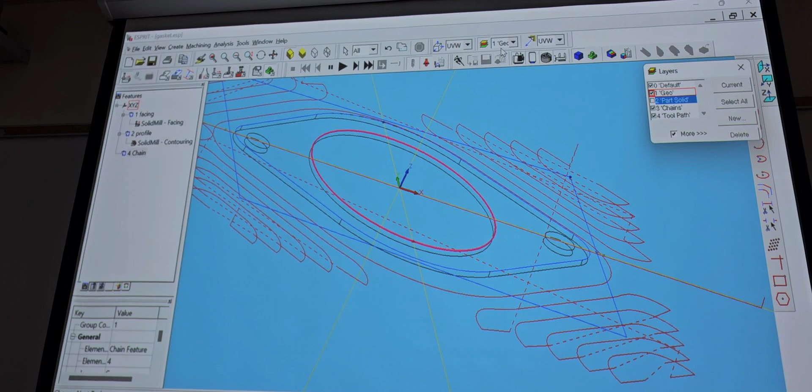So what I'm gonna do now is do the inside one now, right? So I'm gonna pick that chain, come up here, and I'm gonna go pocketing this time because it's a pocket, correct? So up here under general, it already says pocketing. Rough pass, yes. Finish on the wall, no. I could use the same half inch end mill for this, correct?

Come down to strategy. Stock allowance, stay inside, feature. Depth? You gotta change the depth. Yeah, okay, so on there we're gonna go 0.1 also. Alright.

So other than that though, all this looks pretty good. Go to pocket, we don't really gotta change anything. Here's my cutting speeds and feeds. Notice that it's on a different page, right? The other one, it was on the general, correct? It would come out, but since we're doing pocketing, it's under where it says rough, right?

15,000. So we would have to change this, 2,000, spindle 20, and then 40.

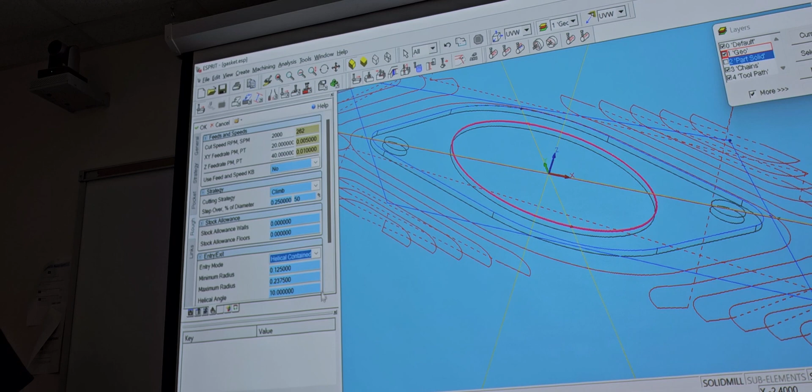Alright, like we said, the stock diameter and everything, entry mode is going to ramp along path, so it could plunge, helical. Like I said, I like helical. Go to the second, alright, everything else we can leave it there.

So now when we run it, facing, there's a profile, and then a helical.

Alright, so the only thing left is to drill the holes. All I gotta do is make a point. See how I took it to the center? Same thing here, right?

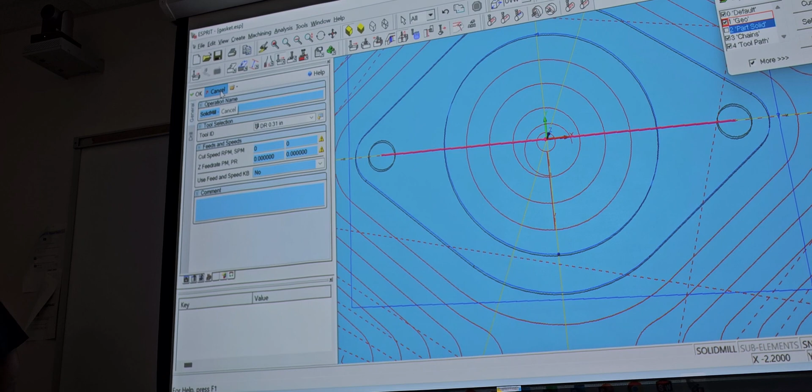I'm gonna go to drilling. But remember guys, we gotta make the tool also, right? So when I come over here, it's gonna go to drill and 0.31, right? Hit OK. I'm gonna hit cancel because it probably put it in tool number 19. So we're just gonna fix that and put it in tool number 3. Okay, so I put 2.

Now hit OK, come back over here, go back to the P-top, go down to drilling, alright? So it's drilling, what tool? Well, we just made it, correct? Give it a RPM.

We'll do 800, because we're drilling. Feed rate, probably like 15, alright? Go to drill total depth.

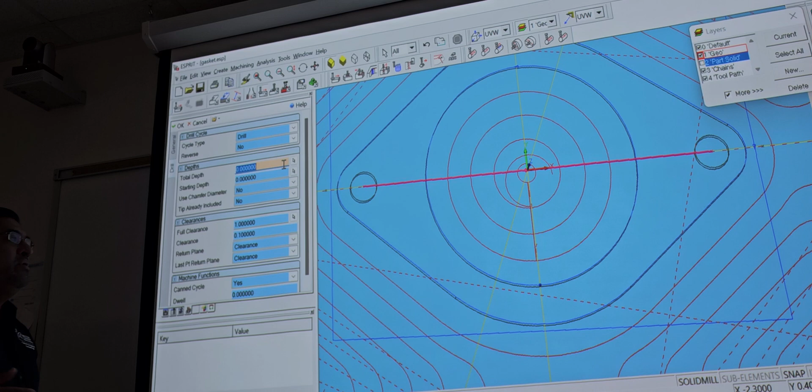So in our case, it's asking right here, where it says cycle type — are we just gonna drill? Just a straight drill, right? Or are we gonna do pecking? Are we gonna do tapping? Here's where you would change the numbers, and here's where it would give you a G83 or a G81 inside of your code, right? We're just gonna do regular drill, reverse it, no.

Total depth, 150 is fine. All right. 150 thousand — oh, I thought you said 50. So start depth, we're gonna leave that at 0, at Z0, right?

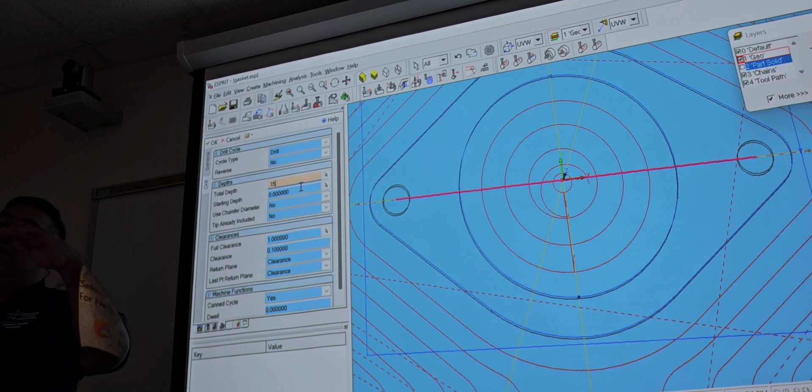So the reason you would change that is if you're drilling a hole that has different planes. You get what I'm saying? You could start drilling, like if you have a plane like this, over here versus at Z0, because you're just gonna be cutting air all the way down, right? I cut air all the time.

So canned cycle — here's where you can tell it whether it's a canned cycle or not. Dwell, your tip already included, yes or no. So you can put no, and then it's gonna take it a little bit further than 150. Does that make sense? So after that, hit OK.

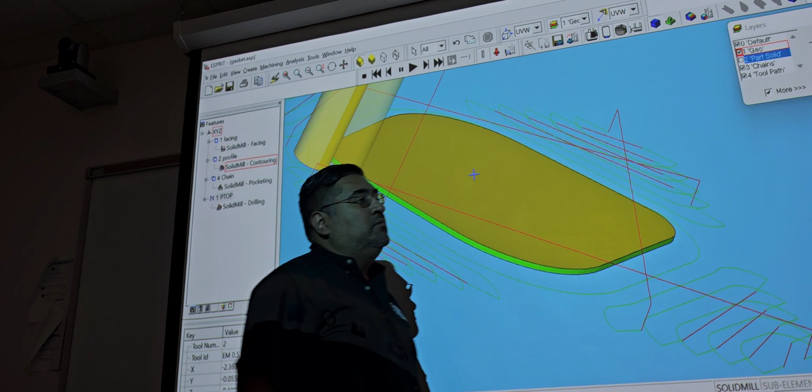Oh, I gotta see what that's. And there it goes, guys. So now, 0.15. So now when I hit play, it just made my whole part. Yay, too easy?

Should be, will be eventually. What the heck, it's on there? So also, the way I just did the drill holes is I would — alright, so if I hit stop now, alright, now we'll go to File, Advanced NC Code. This is where the post processor comes into play, right? You guys don't have this.

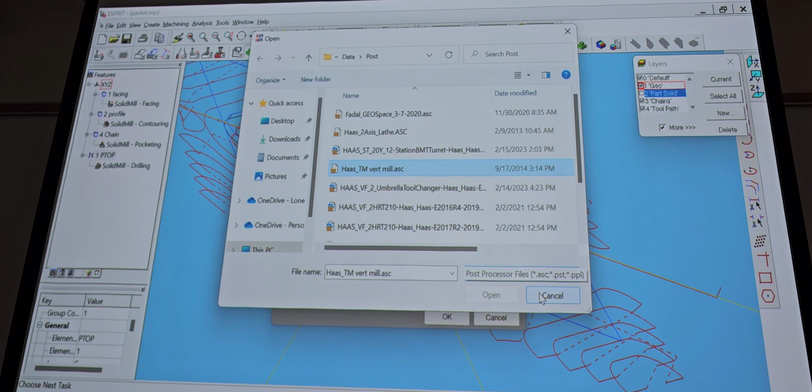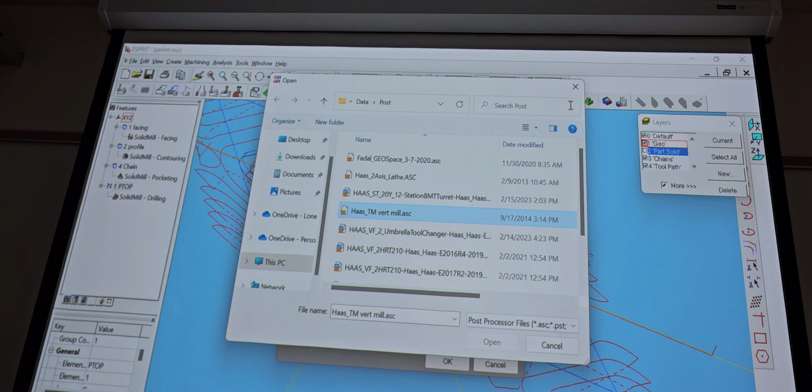Oh, did they take it off the machine? Oh, I hope not. It's not letting me open it. Now you can. Now you can't. It goes away. Roll. Maybe you hit the drop down under the file name on the bottom. No. Let me see if it's because they took it off of this machine. Plug it in, plug it in.

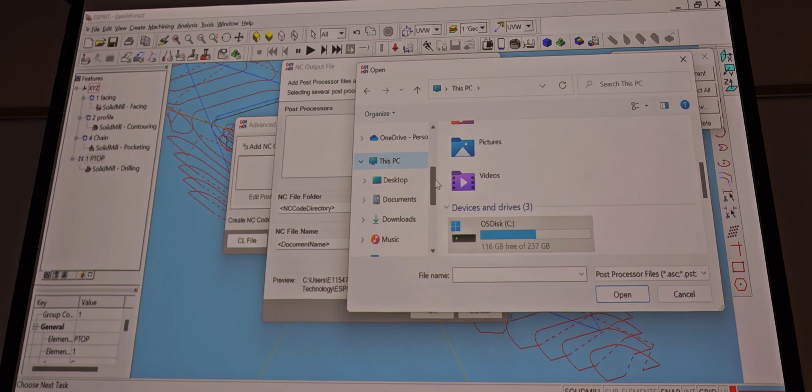What's my flash drive? In the computer. Oh, but it's not coming out. One either. Oh. Uh-oh. Nope. Hmm. Hey, Rick.

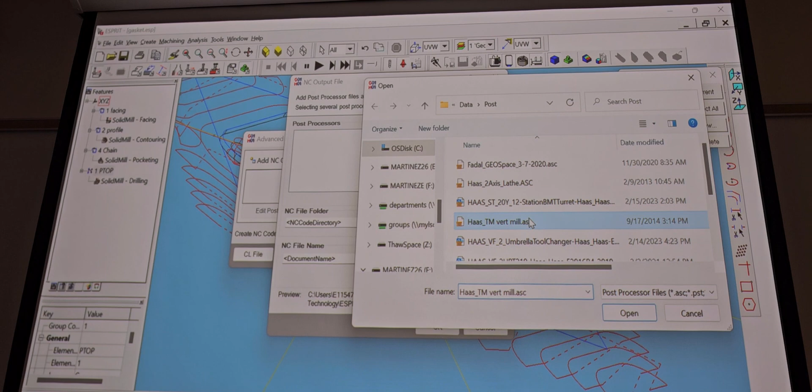Yeah, go ahead, take a break, guys. If I don't have it on here, I'm gonna have to get the ITs to come put it on again. But it should have been — can you hit that drop down on the bottom? Hit cancel or go out of that. Oh, it wants to do it. Unexpected error. I'm saying under the bottom where it shows file name, there's that drop down arrow. When you don't have nothing selected, you could see if you could hit that to select it.

You know, when I first opened it, like right there on the bottom — yeah, you see it, it says open, right? No, but look to the left, you see the file name where it's blinking? Hit that drop down arrow on the right side of that box. Right, go here, down, no down, over, file name where the — go down, yeah, go to the right and click that drop down. See if right there, see if that'll work. Oh, it was worth a shot. Nothing else was working. No, and even if I type that in, I don't know if they erased it from the computer.

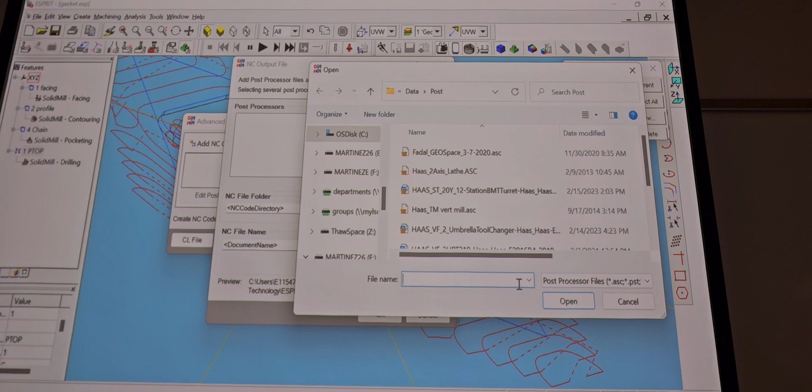Uh-oh. Oh snap, might have found it. Ah, we have hope. Not opening it. Sons of bitches. Yeah, let me see if the flash — because I had it on a flash drive, but I don't know where that flash drive is at.